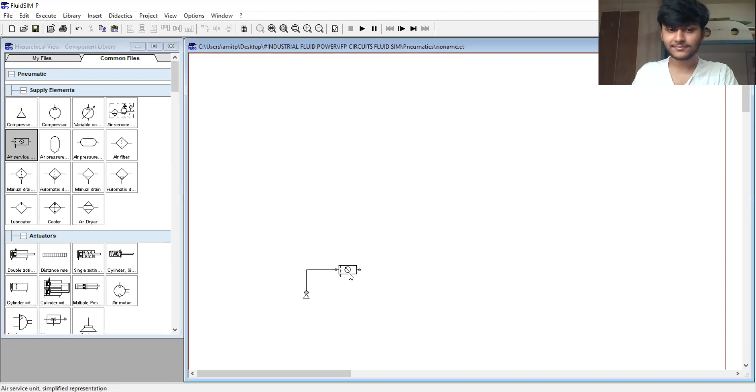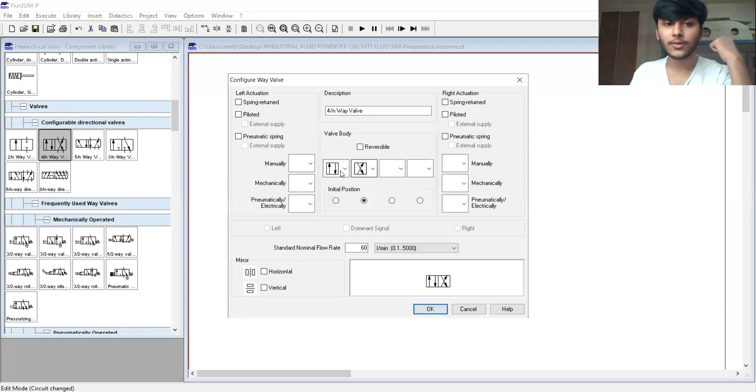So let's start with the basic circuit. I'll make the FRL and the power pack as quickly as possible. As we have discussed in the previous one, we'll require a 4x2 push button operated DCV. In industry, 5x2 is usually used, but here we are using 4x2 as it is available. It will be spring returned and push button. Output port, we need muffler. This is a basic power pack.

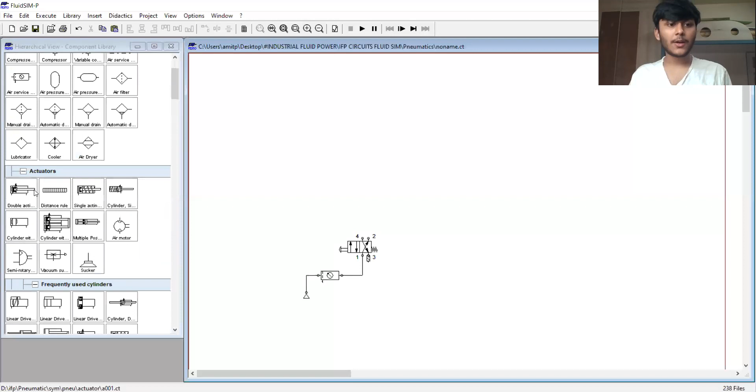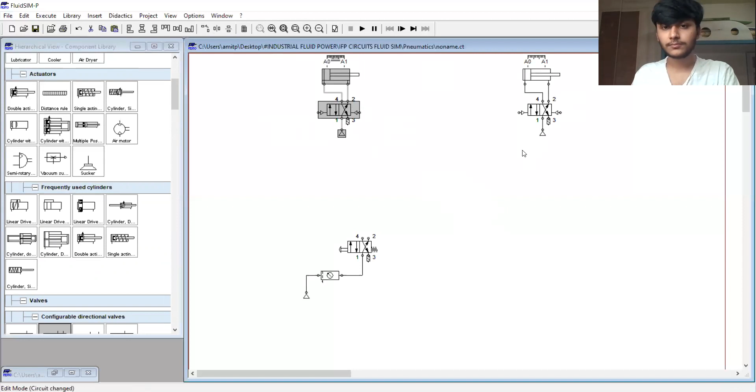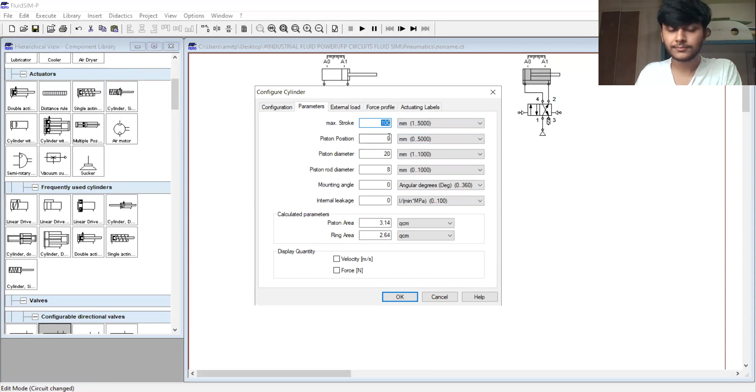Now we have to make two DA cylinders. Instead of making it again, I'll just copy it from the previously made circuit. Now that we have done, I'll close that circuit. Now we need A minus first. So the piston position at the start has to be controlled. That is why I set the piston position to the full stroke length, 100. Similarly here also. Now this is cylinder B, so I change the actuating labels.

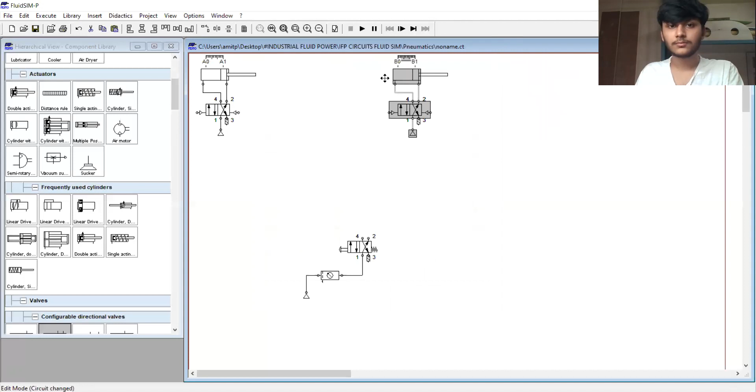Now this is the circuit. We usually actuate this first. So when this is actuated, the left envelope will get activated and it will supply from here and will result in the forward stroke. We actually don't need that, right? We need A minus first. So in this case, we do cross connection. This is called straight connection. Now what I'm going to do is called cross connection.

So if you see, the lines have crossed here. So when the left hand side envelope gets activated, we'll get A minus. Okay, so this is a basic start of the circuit. Similarly, you have to do the same cross connections in the other cylinder as well. Here you can shift the lines by clicking and dragging in this software. So now we have done.

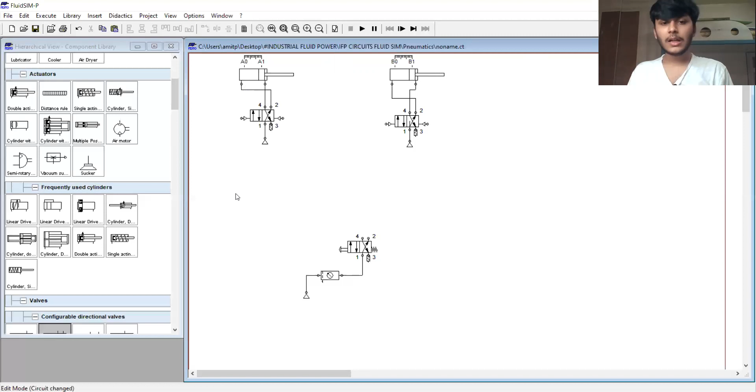Now our sequence is A minus. So when the push button is pressed, the left envelope gets activated. So fluid will flow from 1 to port 4 and we get A minus. Now after A minus, we need B minus. We'll use a 3x2 roller, as we used in the last circuit. And this will confirm A naught, that is A minus. After A minus, we want B minus. And this will get connected in the same line like this.

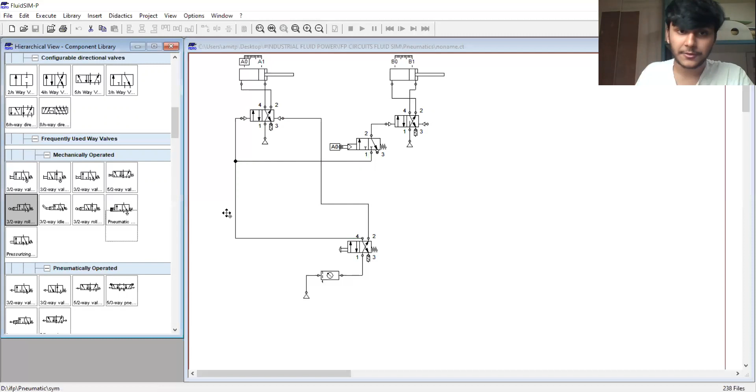Now after this, when the push button is released, due to the spring force this right hand side envelope will get activated. We want A plus. So from 1, the fluid will flow to 2, and then we get A plus. After A plus, on confirmation of A plus, we want B plus. This will only get activated after A1. And now we have finished the circuit. So let's simulate it.

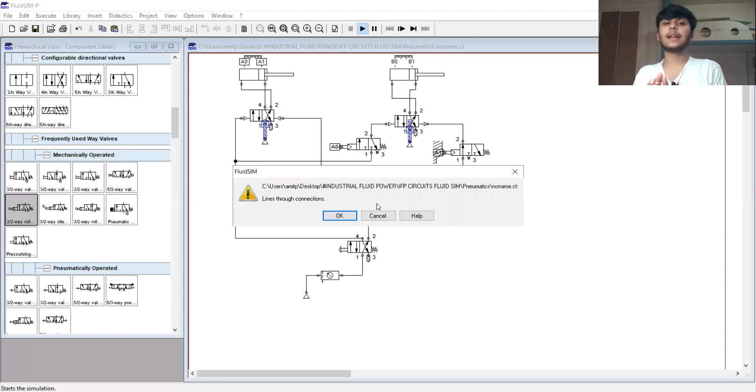Now what I see is lines through connections. This means sometimes the lines get overlapped while making the circuits. So what you need to do is either delete the line and make it again, or you can shift the lines. I have deleted and made it again because it was easy, right? Now let's simulate the circuit.

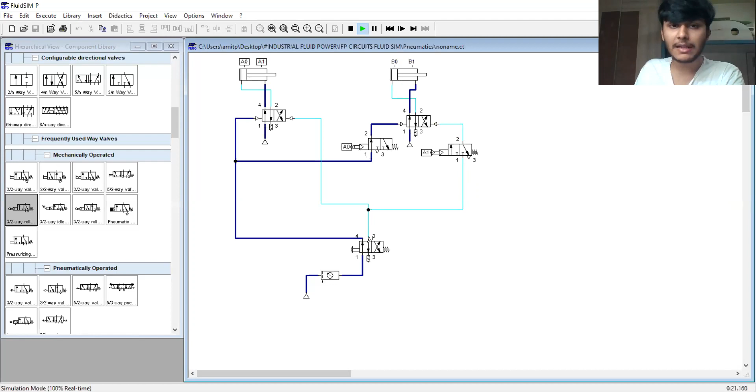So before pressing the push button, everything is in its origin position. Air goes from the compressor, FRL, then it stops here. It goes from 1 to 2, and these both are back to their original position. Now, when the push button is pressed, we get A minus, B minus. When I release the push button, I get A plus, B plus. Now I've got my circuit. This is the simplest explanation of the circuit.